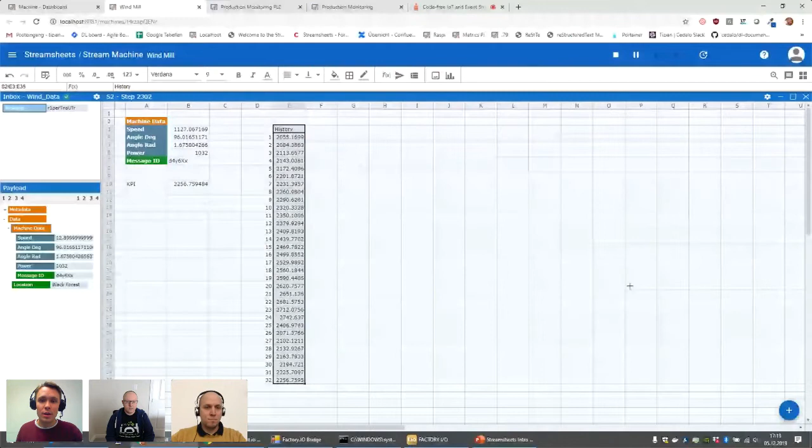And if you want to visualize that now, you can also do this really quickly in a kind of way which you already know from other spreadsheets. So really just clicking on the icon up here and then putting it right into the sheet. And then you can change the types, for example of chart, which you want to visualize.

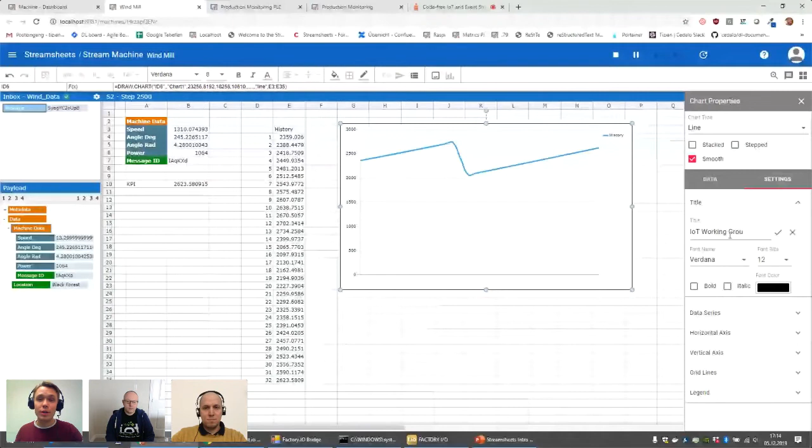And of course, you can start really quickly also giving it, for example, IoT Working Group, giving it a title. So really work with it in a kind of way which you already know from another spreadsheet. But as you see, everything is automatically dynamic as it's being fed new data and it's updating. And yes, so that's really how you work with it in a very Excel-like kind of way.

And if you were going, for example, for a dashboard, essentially you can really quickly blend out all the components you see here. So take away, for example, the inbox, the grid, or the headers, and then you rearrange it a little bit. So essentially you would later on probably drag that over here, or put them down somewhere else, so that you essentially in the end only build a dashboard. You can also take away, for example, this part up here, and then you necessarily don't even see anymore that you've built that in a spreadsheet.

And it looks like we have a question, Philip. Yes, of course, go ahead.

So we have our friend Benjamin Kebe asking, hi, any reason why not integrating natively with Excel or Google Spreadsheets through their respective APIs? Or maybe that's next in the presentation.

Yeah, unfortunately, it's not coming in a presentation.

Yes, we've been thinking a couple of times about that, and something to a certain extent is on the roadmap. But the thing is, what you notice if you work with Streamsheets is that you typically do something else than you do with Excel or Google Sheets, especially compared to Excel. Excel is very static, typically used for reporting. Otherwise, you're really manipulating it quite a lot to make it somewhat dynamic, and that's essentially writing a macro in VBA. Apart from that, it's really something static where you have hundreds and thousands of rows which essentially contain the same formulas and the same information.

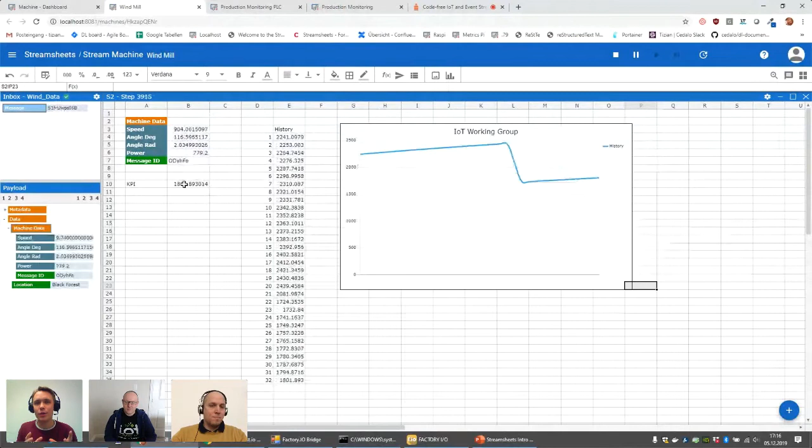In Streamsheets, you really build an application that is consuming or processing this data. If you compare it again, those rows of data, as they are being created and generated, you calculate them right away or process them right away. So in the end, although the way you're building logic is very similar, what you're doing with it is different, because it's not so much a report, but rather really an application.

Which processes real-time data. Exactly. So it makes already more sense to connect it to Google Sheets in a certain sense, because they can recalculate some of the formulas as well. But so far, we don't have a direct connection with that. But you can, for example, export something here or write a CSV file, which you could then import in Excel as well.

All right, that makes sense.

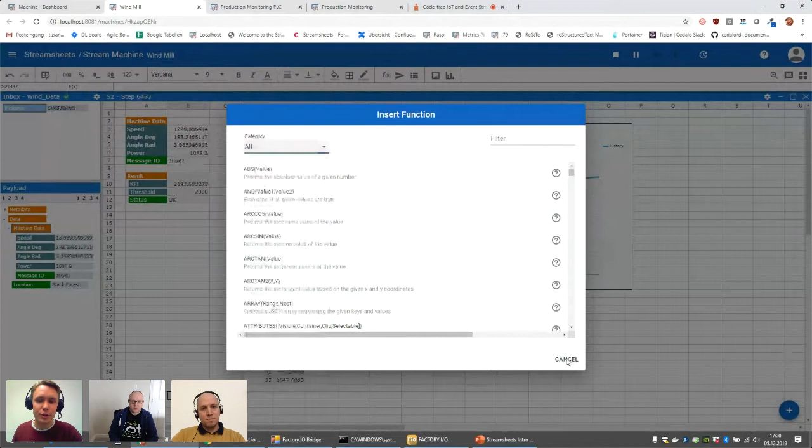So of course we have typical functions, which you see here. These contain the most common ones for engineering, logical, math, statistics. Most of them you already know from Excel, for example, but there are also other functions.

These are the stream functions, for generating a data stream. They include, for example, sending something via Kafka, storing something in MongoDB, publishing something via MQTT, making a REST request, sending a mail, or writing into a file.

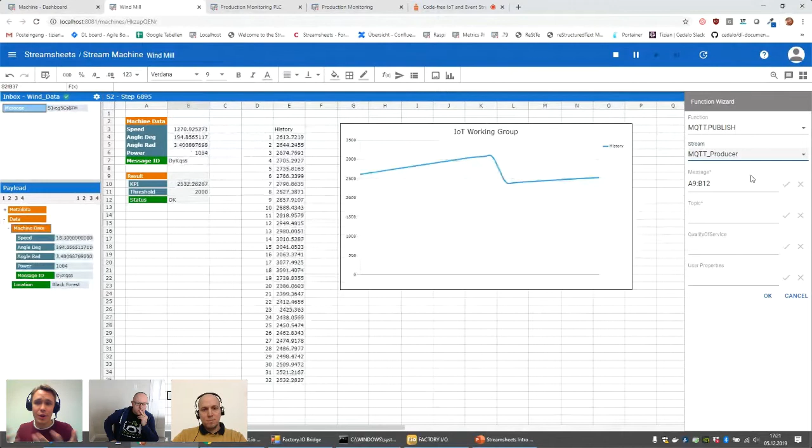So let's just take MQTT to stay with this protocol. I haven't chosen MQTT yet, so I'll just choose a connection which I've set up. Behind that is just a connector which I configured—in this case it's really just the URL and the credentials, and there we go. That's just what's behind the MQTT producer.

Then the function itself looks at the last JSON object in the sheet, but of course this can also be any other cell range which I want to send out. Then we go to a target topic, for example, click OK, and there we go—we already have that in the sheet.

Everything right now is already colorful on the sheet, but it doesn't get any more colorful than that, unless you want it to. So all the special things are colorful—the JSON objects which you drag and drop in, the ones you create right in the sheet, and the stream functions which you have.

It's blue down here, but if I click on it, you should see up here that it's just another spreadsheet formula, which is new. You won't know it from another spreadsheet application, but it also just takes three arguments. So it's really simple to learn because it's just what we typed in.

And that's really cool. To me, this highlights an interesting thing about your platform, because you're positioning this as an end-user tool, a code-free tool. But people knowledgeable about Mongo and MQTT and all of that can leverage the platform to do stuff like what you just described. I wouldn't expect an end user to do what you just did, right?

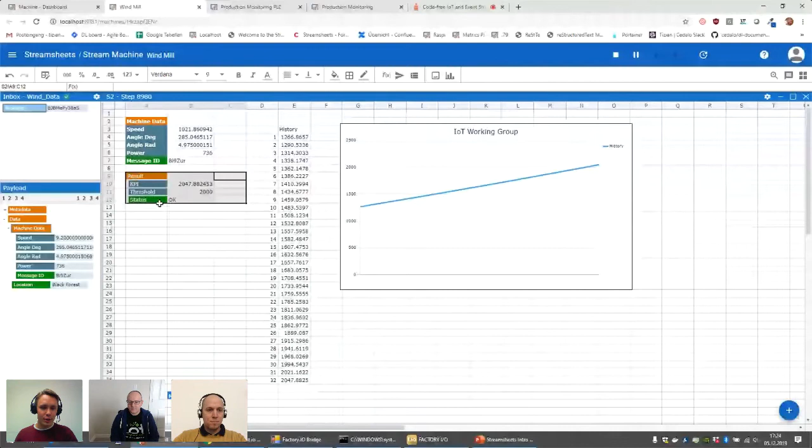Just wanted to show one more thing right here. We're checking the whole time whether something is okay or not okay, and then sending out the whole object, this whole cell range. What's cool right now is we can say, okay, I don't want to send something out the whole time. What I'm going to do instead is take this information, basically this whole if formula, and put it around the MQTT publish condition.

What happens then is that we only send something out when it's okay or not okay, for example. So we really have a control engine in here that's calculating the whole time and checking whether something is okay or not okay, and we're just sending out something based on that, or sending it to a different topic, because everything is dynamic.

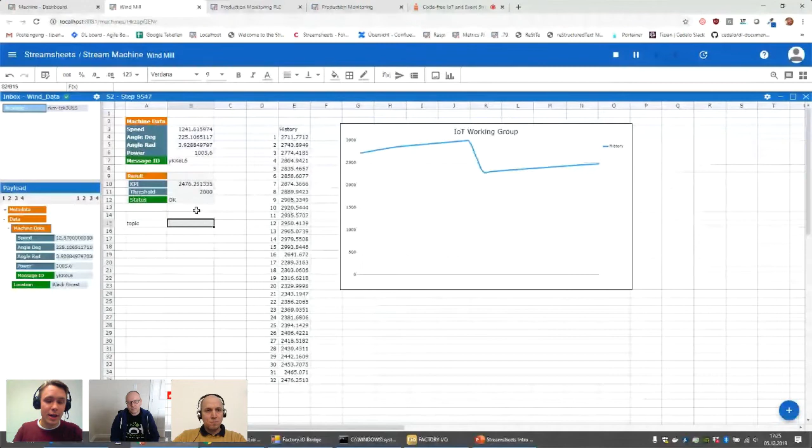So let's say, for example, that instead of having the topic statically in here, we're going to take this one right here. It says invalid because we don't have anything in here so far. So this is going to be our topic.

Right now it's still static, but let's say, for example, we're getting that with a message, which could be what we are getting in B7. We're going to take just the right part, so let's assume that what we're getting in the message ID somehow already contains the topic we want to publish to, in this case the three right letters. So that's essentially this, and as we have this cell also now as a parameter in our MQTT publish function, we are now dynamically also sending something out.

And as I said, if you take on top of that also the if function which we have right here, and wrap the MQTT publish with that, then we are even dynamically sending out data to these different topics based on whether something is okay or not okay. And that's also just really simple here, so it can get a lot more crazy than that.

But picking up Simon's question, that's essentially in the inbox, it has its own menu. So it has what we call a consumer, so data which we consume. You can tell it how it's supposed to run, continuously, or in this case, event-driven on message arrival. Let me show you now how this consumer is structured.

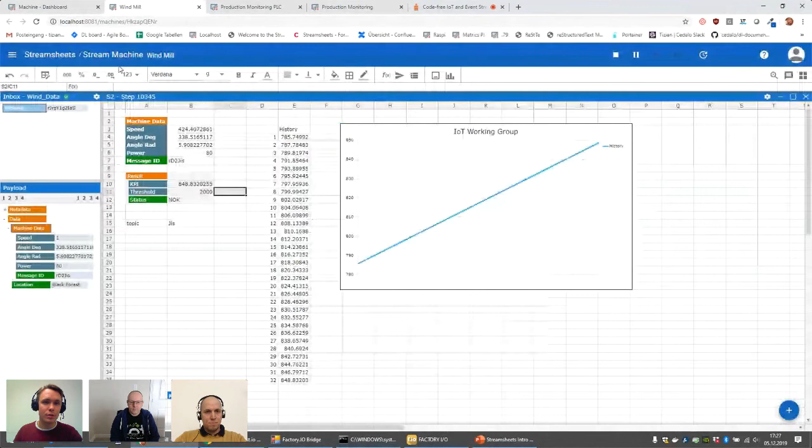There we go. It has a name, Wind Data. It's based on a connector, and it essentially has just an MQTT topic. So that's essentially what you're going to have for each data stream.

You see them right here on the left-hand side, and there's a hierarchy to them. You have a connector to basically connect to a larger system, so that's typically like a broker or another server. Then, depending on what you want to do there, you have consumers or producers, and the consumer consumes the data stream while the producer produces the data stream. And they are all, in this case, like here with the MQTT connector, based on one connector.

Let's go really quickly into how that MQTT connector is structured. So that's it, we have MQTT. It also has a name, and there you have a URL. It's in this case just called broker, because right now I have my local one running. It has a username and password in this case. You can also have credentials or certificates, for example, and that's really the way how you then connect to something.

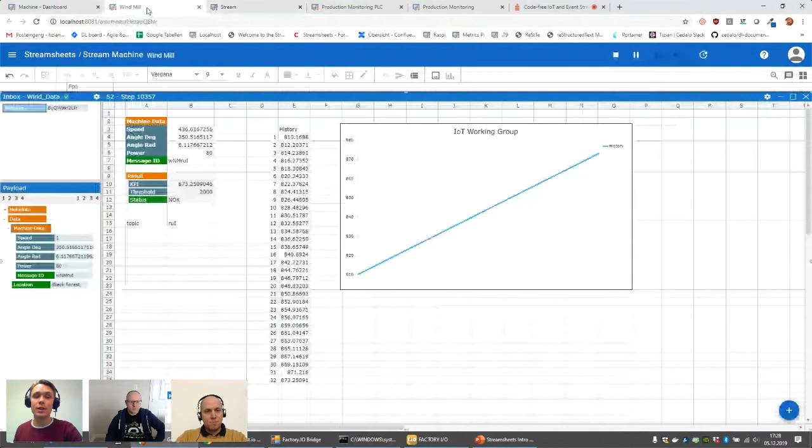So you have the larger connection information basically in a connector, and then based on your connector, you're going to construct consumers and producers, and that's what you essentially then choose right here, which makes it also quite nice from an administrative point of view, because you can have somebody who possibly understands a little bit more about the whole system, or for example is organizing all the access points, or just have one person in charge of making all the connections via the connectors to different servers.

And then you have later on builders who build essentially just applications, but shouldn't necessarily be given the rights to change servers, for example, to access other servers, brokers, or systems. They're then just going to be given consumers and producers which they're allowed to use, and within these limits, within whatever they have access to, they can basically deal with the data and build applications.

So essentially, you already have implemented role-based access control in your platform, and you can even define scopes where a specific account or specific group can modify stuff. Exactly, that's fantastic.

Thank you for answering. We've got another question in the chat from David Kessering: what are the resource requirements versus stream rates?

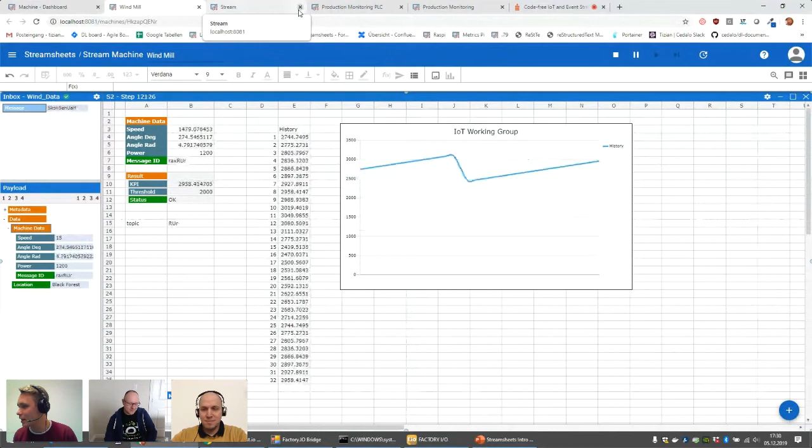So I suppose... well, I'm not supposing anything. Suppose away, so to say. Yeah, I guess that's actually aiming at stream rates, how many messages and what the whole platform does, and then looking again at how the resource requirements are there.

The problem with that is there's really no simple answer, because, as always, it depends. It really depends on the message rate, and also a little bit on how many calculations you have running, for example, and how many of those stream sheets you have running.

What we've seen is that you can really run several of those sheets on a Raspberry Pi, also on a Raspberry Pi 3, so it doesn't have to be the latest version, at cycle times running cyclically at, for example, 300 milliseconds or as long as you want. But it's really difficult to give you exact numbers.

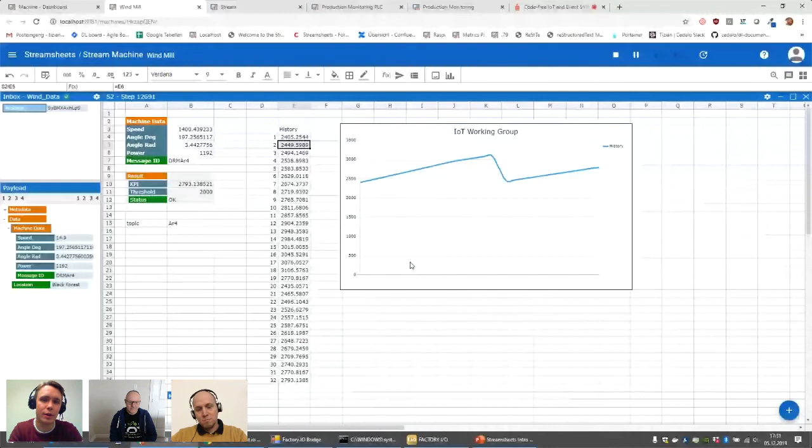I know I'd love to have them as well, but it really always depends quite a lot on how you basically structure the system.

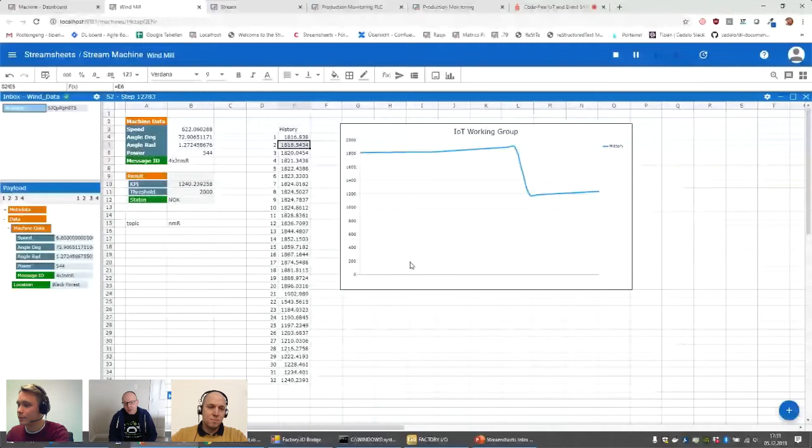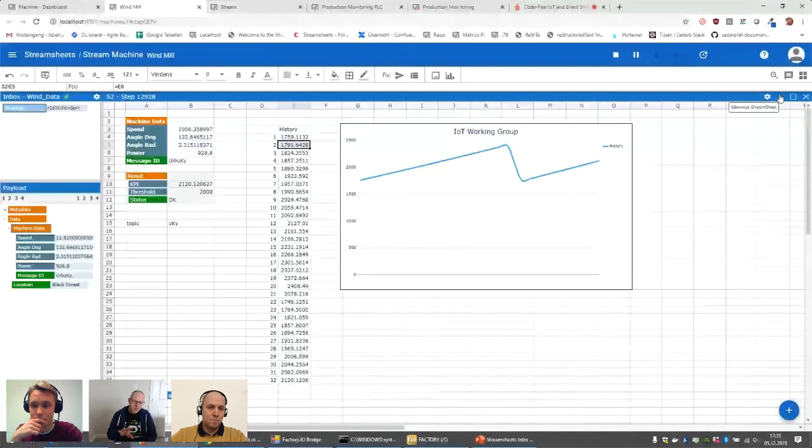So if we think a bit about what could influence the whole thing, I suppose the sampling rate for whatever sensor you have, the number of concurrent users. Is it more expensive, for example, to have several people looking at the same stream sheet versus several stream sheets in parallel accessed by various people?

Can you dig a bit deeper on that? Yeah, so it's essentially not so much how many people you have on the platform or how many people you have looking at them, but it's rather about how many of those stream sheets you have running.

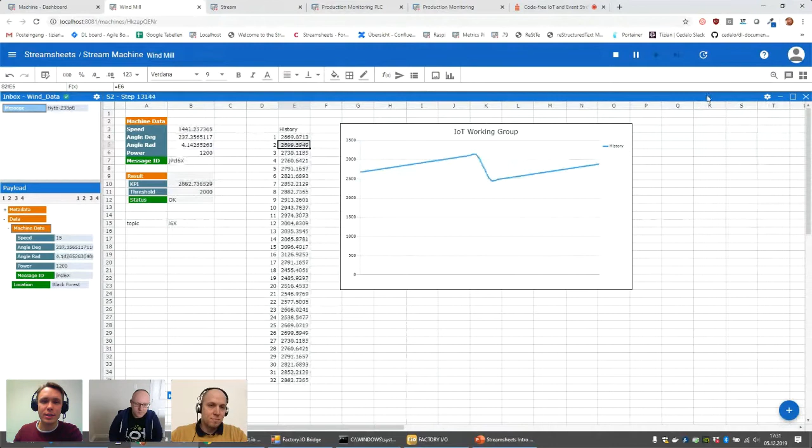Digging a little bit deeper, what you see here is one stream sheet, that's really the sheet. And if you look a little bit closer, you also see the name Stream Machine up here, and that's just one sheet which we have right here. You can have several sheets more - we're going to see that in a second, also in another application.

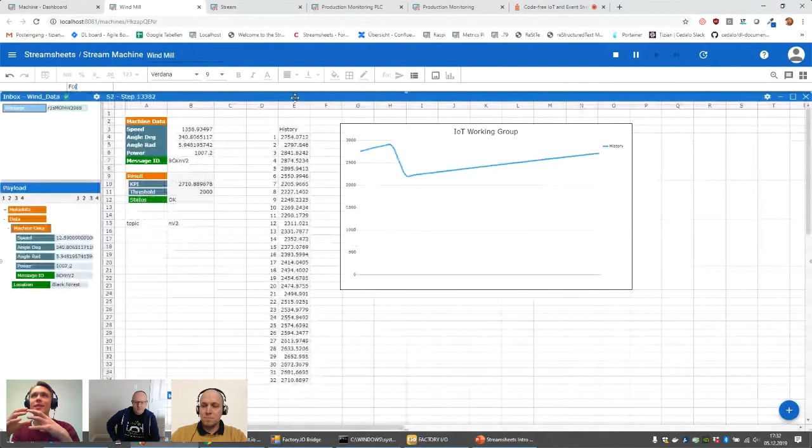And that's then really - you're essentially building a stream machine. The stream machine is, if you look at Excel, it's like a workbook. So I can have several worksheets in there, and in the same case, you can have in a stream machine several stream sheets.

Why do you do that? Because one stream machine is one microservice, and the way it runs essentially, what it does, you configure that via the several stream sheets it contains. So hopefully I haven't lost you yet, but one of the main calculating components here is really how many stream machines you have - essentially how many microservices you have running on your resource, and how the data rates are, for example.

So how quickly they have to calculate. The main components are how many microservices, aka stream machines, you have running, and how much data they are being fed. The big point is not so much how big the payloads are, but rather what the frequency is of the data coming in. So those would be the main factors.

What's also quite nice is that it's really a server application you're building here. So for example, if everything is happening too quickly and my client, essentially my browser, can't handle it, there's already a load balancing in place, so you won't see every calculation step, but only every second, fifth, or tenth, while still on the server every calculation step is being calculated. You just don't see it necessarily, which if you don't have a visualization where you really want to watch a movie, doesn't matter at all.

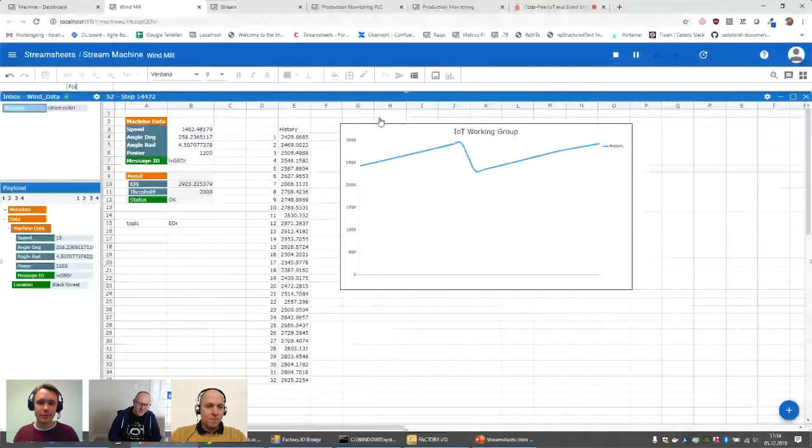Well, thank you so much for this short look at what's happening under the hood. Of course - just really also from my side here a little bit, because that's now like a very simple application which we just built here quickly.

The nice thing about it is you can really also control something with it. And the thing here is it's a tool, not a solution to one specific problem—unless the problem is what we're basically doing here: you want to build something quickly and without coding. But in the end, you have to make it your own a little bit. So again, taking up the similarity to Excel, it's a tool, and you have to make it your own and build your own solution. But that's also one of the main powerful features here.

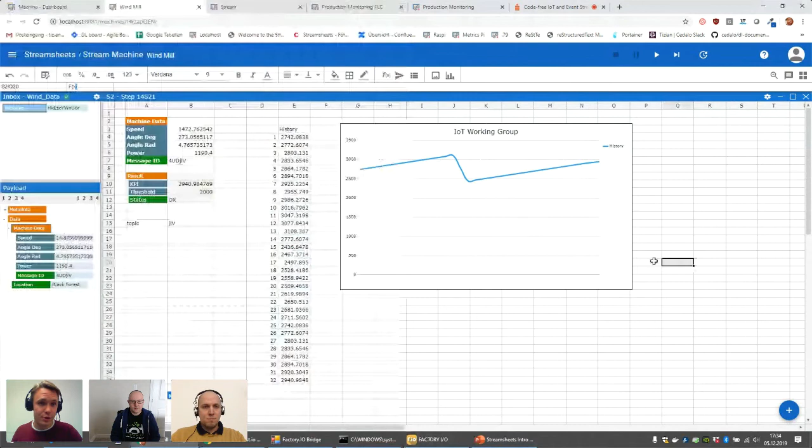So what I want to show you now—this is not our software here on the left-hand side. Making a little bit of advertisement for Factory I/O. It looks like a game platform, and that's because it is, or it was, but you can also build nice, very simple production simulations with that, which is always quite nice for us because we don't have any hardware.

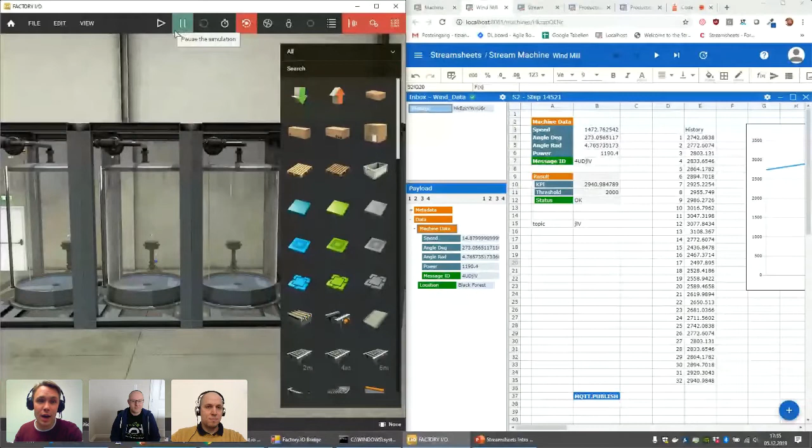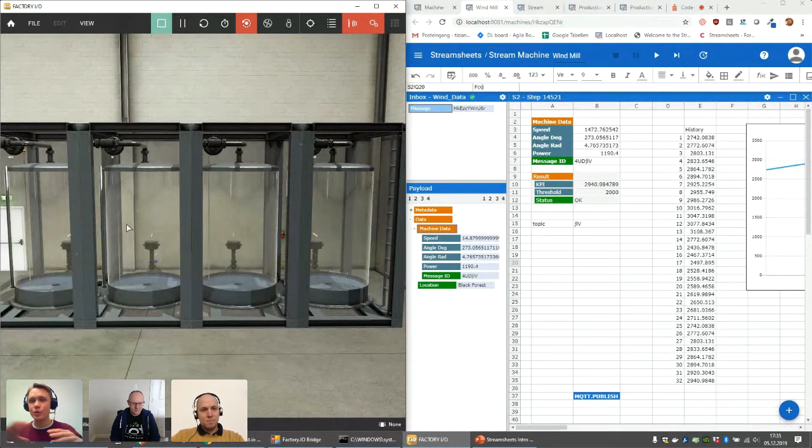I'm just going to click play here, and you see that nothing is happening—that's what it does. You have components, conveyor belts, and a couple of machines which you can assemble into an assembly line or a production line or whatever. In this case, you just really have tanks.

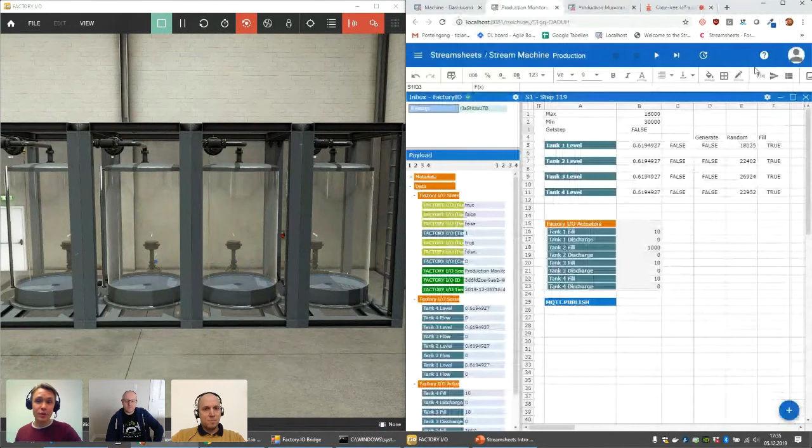What we want to do with them right now: I have another Streamsheet right here which communicates with this Factory I/O simulation via MQTT, and you see that the payload is also a little bit larger than what we got from the simulation before. I'm just going to click play now, and you see that right now we are starting to fill the tanks. The nice thing about it is—I clicked on Factory I/O before just to show that it's already there—and now the whole control over how it's being filled is essentially just controlled by this Streamsheet here.

If you've paid close attention to what we did before, you see that this right here is essentially just data which we're going to send out. So a couple of if formulas and references, and all the magic is nothing else but essentially these formulas—so 4x4, 16 formulas, and that's it. All of that basically makes the water levels or liquid levels rise, drop, and everything in a randomized kind of fashion.

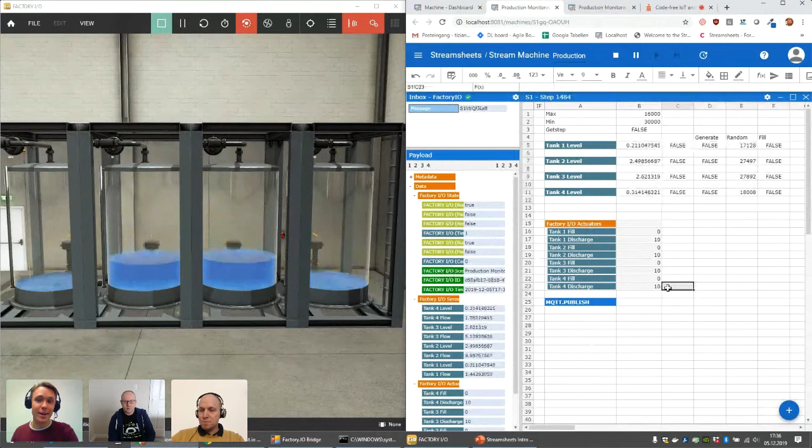And then we have another stream machine, so essentially another application, just to make the whole idea a little bit more complete. So we have something controlling the simulation so it goes up and down, and let's just assume that this already runs, and we just want to make sense of the data for now, or of the whole process. That's essentially what's happening in this Streamsheet here, on this stream machine.

So we are looking at the different tanks, and as the trained eye would notice, all of these have just been dragged in via drag and drop into the sheet. What we're doing here really is just looking continuously at the level—we see whether it's being filled or not. You see really on the numbers here how it rises or not, basically whether it's a 0 or not.

What we're doing here is really just looking at whether it starts, when it ends, with the idea of calculating how large the batch is which we're creating, and what the value of that is. So let's assume we have a production line or a plant which is essentially filling tanks. We can now look at how long it took to create one batch, and also put a price tag to that, for example.

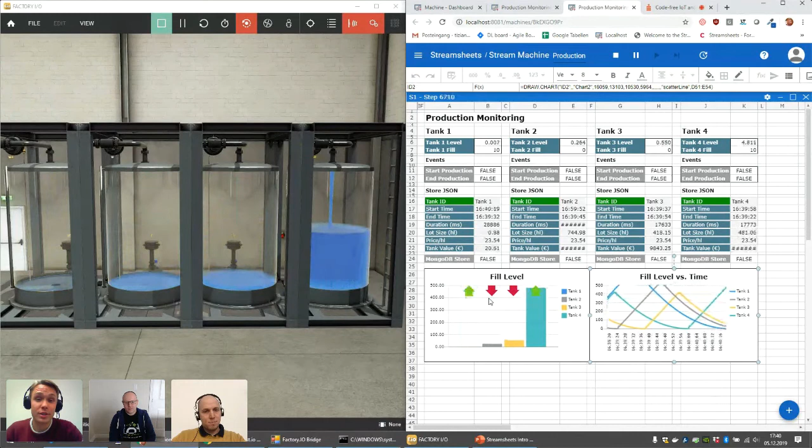One of these is really just stream analytics, so calculating a couple of KPIs which are being fed or monitored continuously. Looking at those, a little bit similar to how we did in the first application, monitor those values and see whether something is going out of bounds.

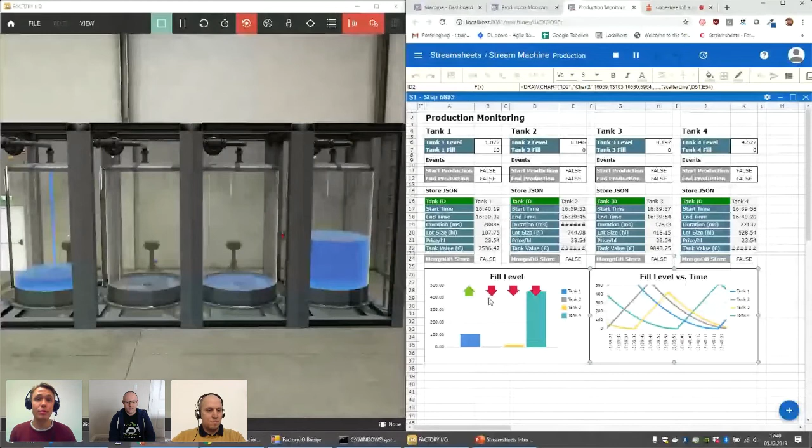And if it does, create a rule engine out of that and trigger actions, for example. Another really interesting thing is mapping from one protocol to another - for example, having MQTT data coming in, sending that out via Kafka, and storing that in MongoDB, or having an application which just supports REST, making REST requests, taking that data in and transforming it into a data stream.

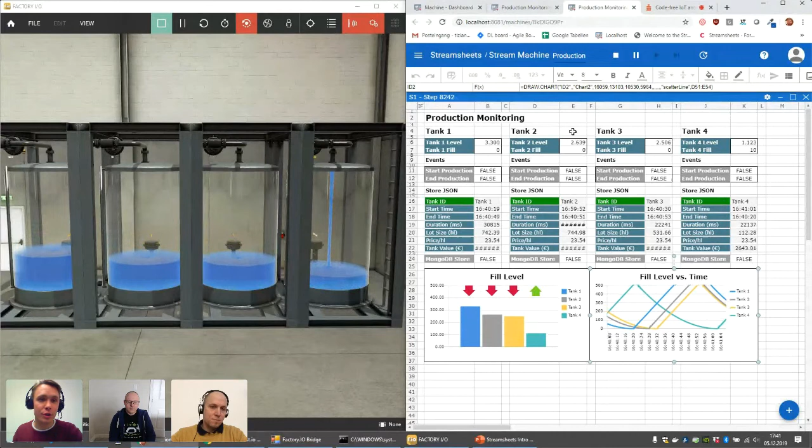That would be it now, almost the basic presentation in the sense of what you can do with it, looking at a couple of use cases. Now I'm just going to show you one more thing - let's check whether I actually have that running in here as well.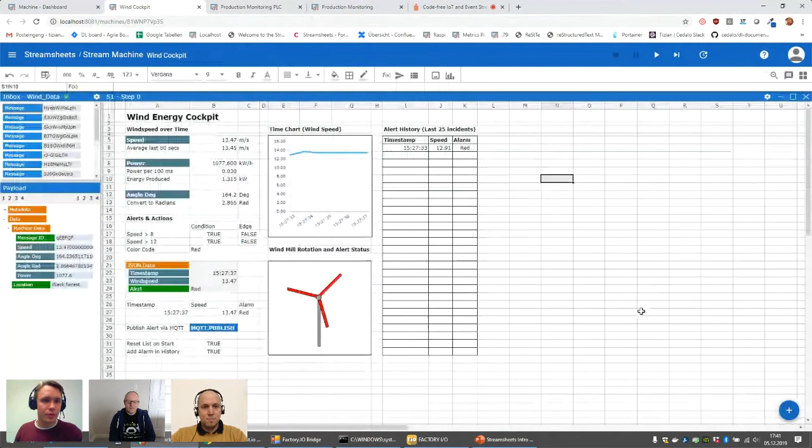There it comes, takes a second. That's a cockpit - sorry, just wanted to look at the windmill itself again. Going to stop the process, it's now here. Then I'm going to hand over to Philip, basically. I can show you something about the architecture.

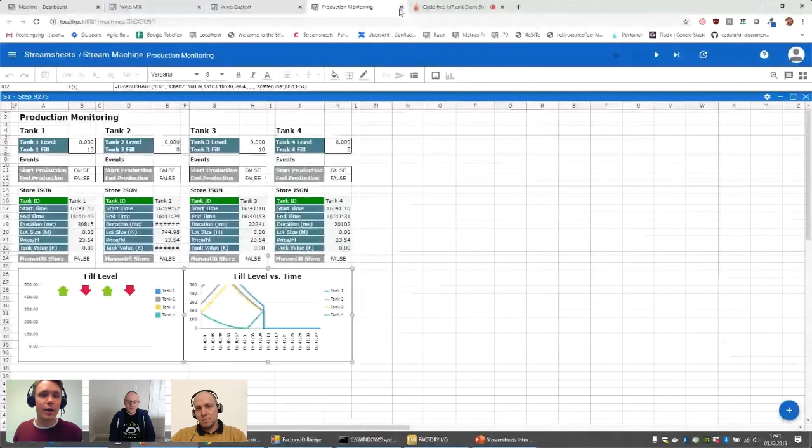One nice thing maybe about it as well - everything is dynamic. We're right now looking at something which calculates continuously, generating data. That's what we used before in the very first application, the simple one, as a data source. What I want to get at now is what you see turning here, the windmill. We've seen charts like line charts, bar charts, there can also be pie charts, bubble charts, all those typical ones.

But what's really cool, you can also build very simple customized charts, for example like this one right here. And you don't have to code in this kind of sense - it's going to stop it in a sec, otherwise I won't hit it correctly. What you see here, if you break it down, is essentially very simple graphic forms.

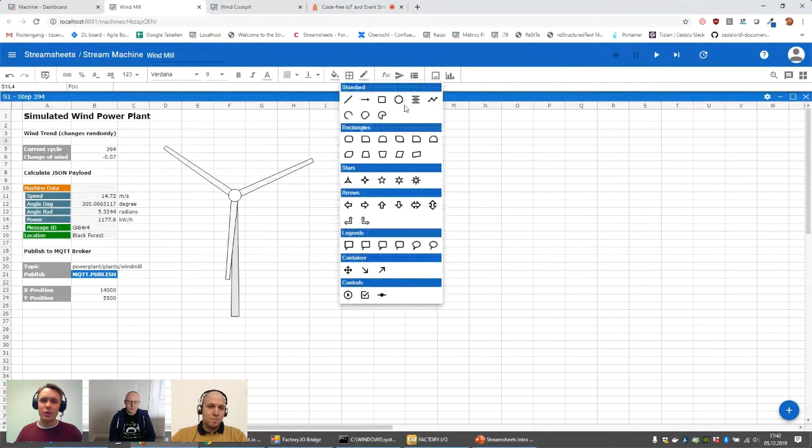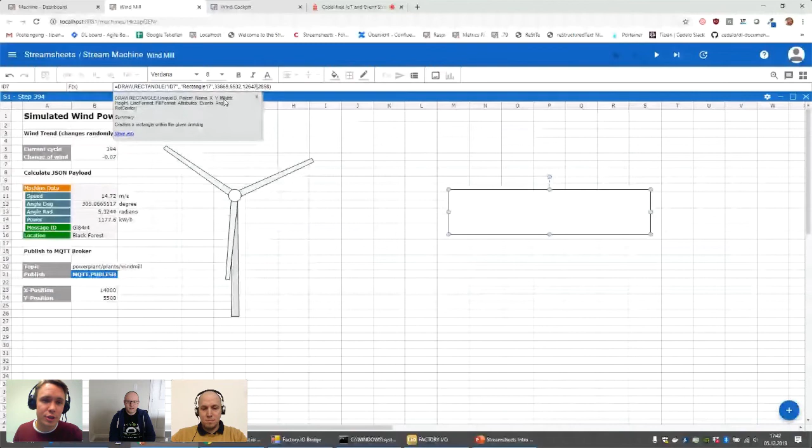If we go here, for example, the same way we just did the arrows which changed colors, you can go in and say, okay, I want to have a rectangle. Then we just have a rectangle. What's really nice is that it's essentially just another formula, which has a couple of parameters - for example, its X position, Y position, width, height, line format, and also its angle.

And that's exactly what we're using here. We're just mapping the calculation back to the sheet, and that's then really just the sine and cosine of a couple of values just to get the angle right. So that's like math from the 10th grade, mapped back to the sheet. But essentially, it's really just another rectangle.

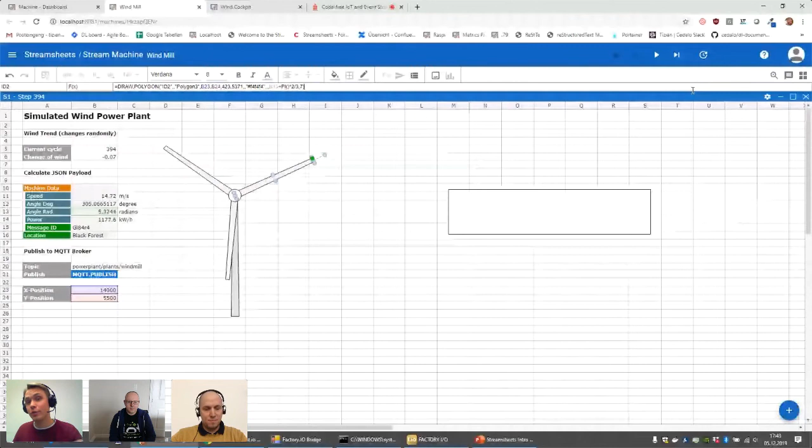And as everything, the input changes, and also this formula for the rectangle is recalculated. Suddenly, if you hit click or play, the whole windmill starts to move, and basically the whole calculation and how that's done is mapped back to the sheet - something you really did in the sheet. That's also the same way the arrows in the application right before changed, because another parameter is really the color, and whether that's above or below a certain threshold, it's just going to change colors.

And we've got a question in the chat. Is the Factory I/O example of input and output available to download?

No, to be honest, it's not. We could make that, we don't have any problem providing this. The thing is, you need Factory I/O, and they have free licenses which you can use, but only for up to 30 days. But we don't have any problem with sharing basically our models for you to use.